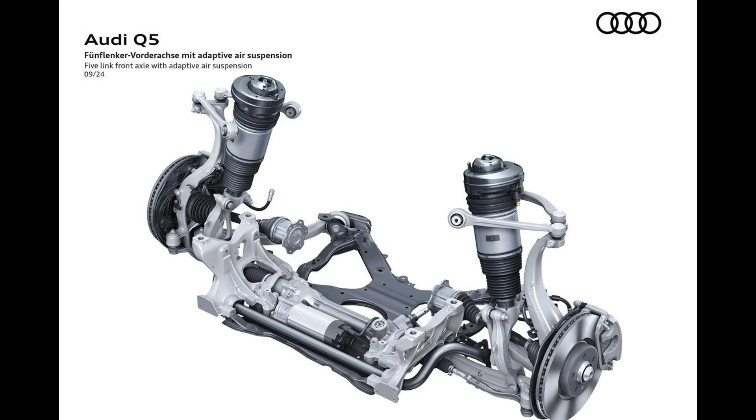Talk Shop: How Air Suspension Transforms Your Driving Experience.

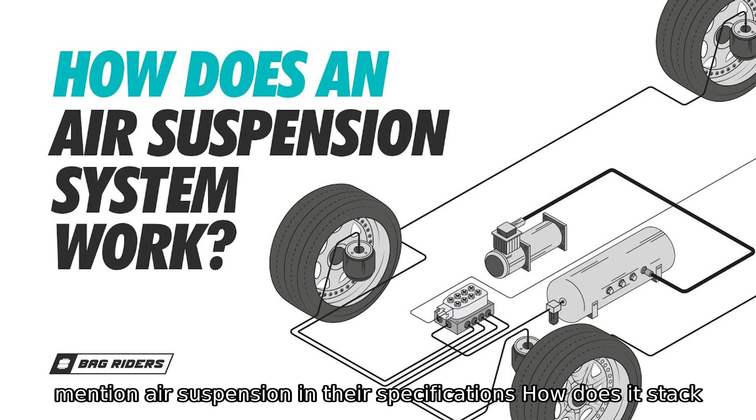Have you ever wondered what it really means when car manufacturers mention air suspension in their specifications? How does it stack up against traditional systems like double-wishbone, multi-link, or MacPherson strut setups? Let's dive into the fascinating world of air suspension and uncover its secrets.

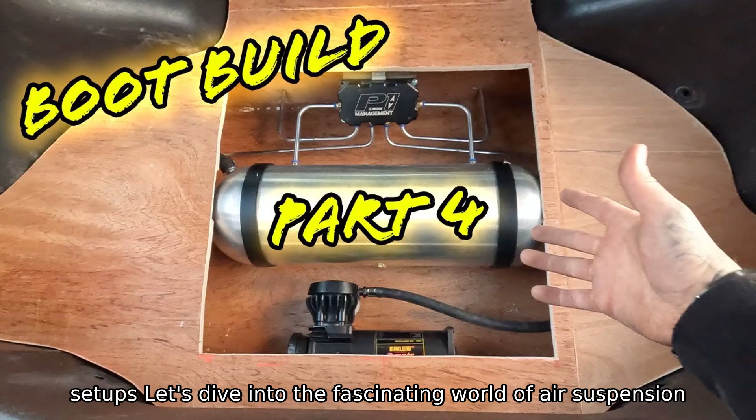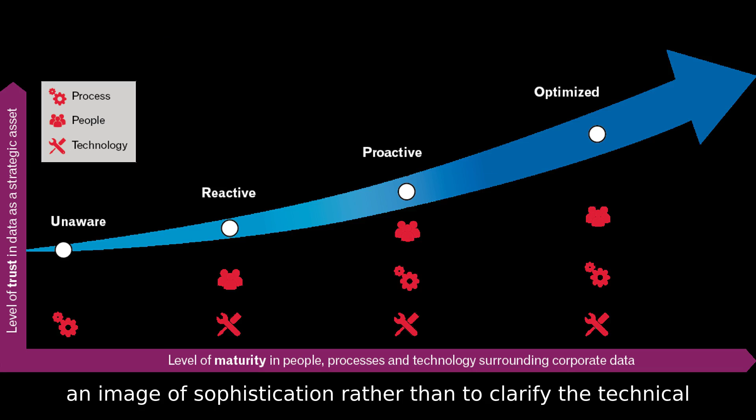Often, when you see the term air suspension on a spec sheet, there's little explanation provided. This is likely a deliberate choice by manufacturers to project an image of sophistication rather than to clarify the technical details of their suspension systems.

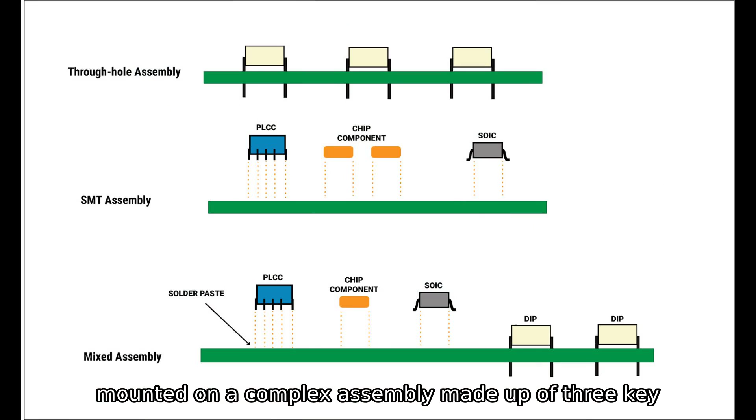To understand air suspension, it's essential to know that each wheel of a car is mounted on a complex assembly made up of three key components: interconnecting levers or linkages, a spring, and a damper. Interestingly, the design of the front suspension usually differs from the rear. This is because the front wheels not only steer the vehicle but also bear 70 to 80% of the braking force.

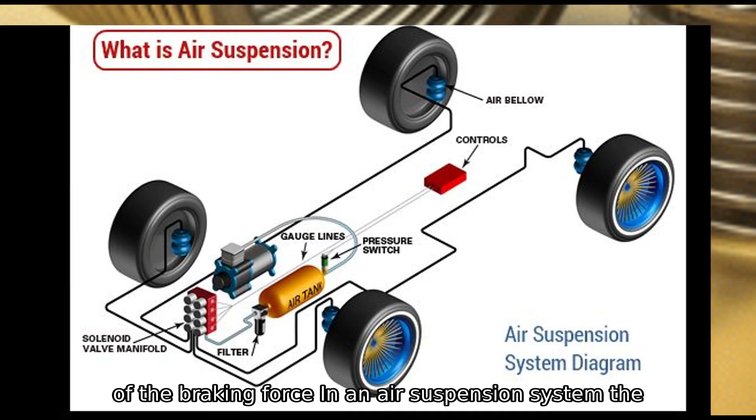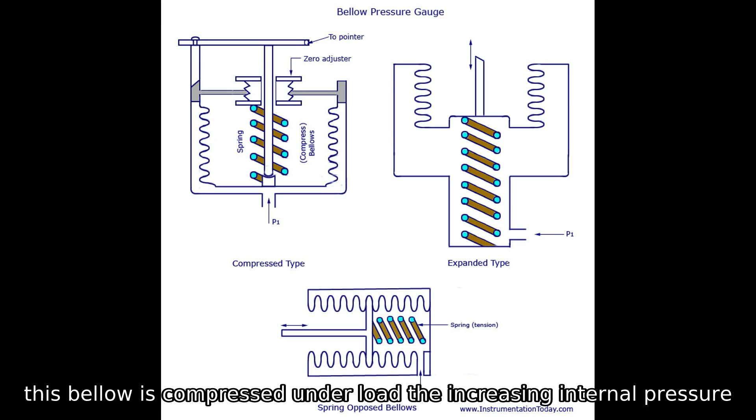In an air suspension system, the traditional steel spring is replaced with a rubber bellow filled with pressurized air, courtesy of an onboard air compressor. When this bellow is compressed under load, the increasing internal pressure compensates for the reduced volume, effectively acting as a spring. This innovative design absorbs road shocks and keeps the vehicle body level.

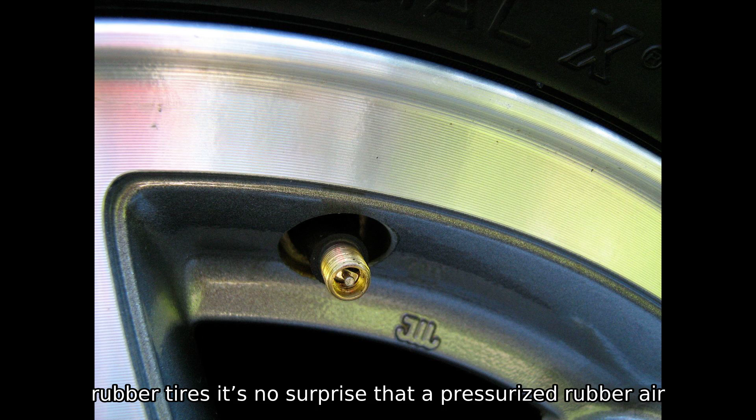Just like how your car rests on air-filled rubber tires, it's no surprise that a pressurized rubber air plenum can handle various road impacts with ease.

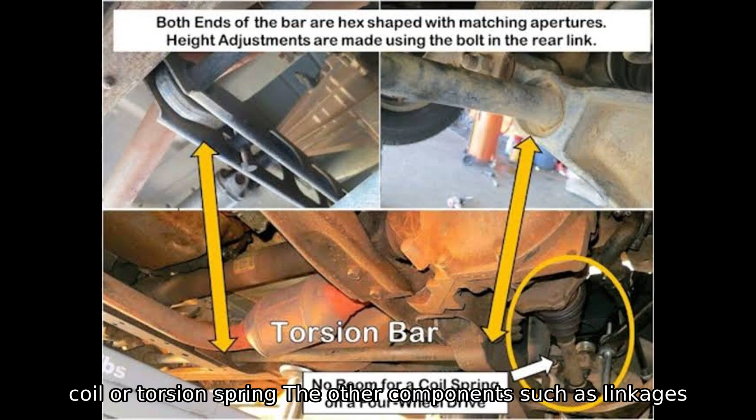What's more, any double wishbone, MacPherson strut, or multi-link system can be fitted with an air or pneumatic spring instead of a steel coil or torsion spring. The other components, such as linkages and hydraulic shock absorbers, remain unchanged from a conventional setup. This flexibility allows air suspension to be utilized on all four wheels or, in many cases, just the rear.

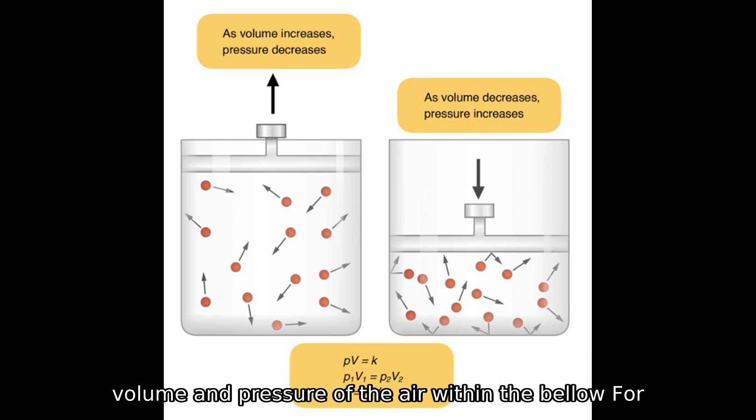One of the standout features of air suspension is its ability to adjust spring rate and ride height by varying the volume and pressure of the air within the bellow. For instance, if your trunk is packed with luggage, the vehicle's suspension control unit kicks in, activating the compressor to boost air pressure in the bellows. This adjustment restores the original ride height and increases spring stiffness to support the added weight. This adaptability is the hallmark of air suspension, making it a game-changer in automotive design.

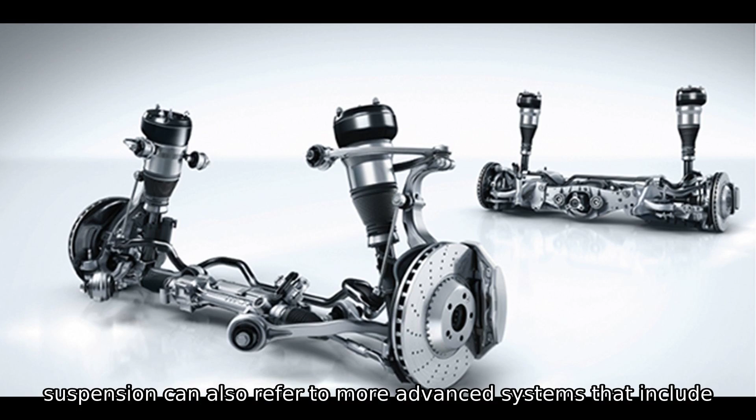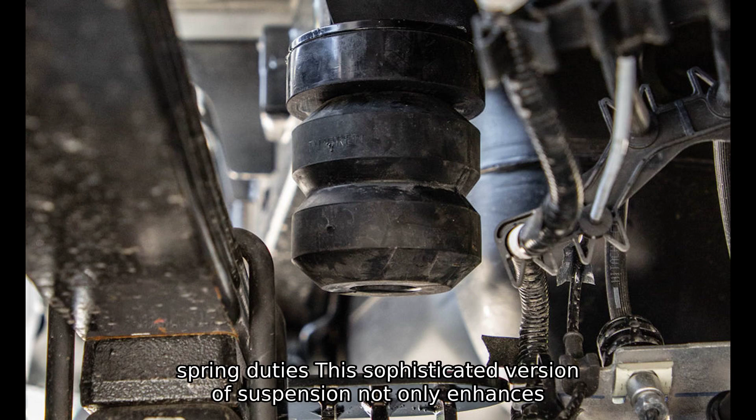Additionally, the term air suspension can also refer to more advanced systems that include variable rate dampers. Similar to the original Citroën hydro-pneumatic system, these setups utilize pressurized hydraulic fluid, aided by high-pressure nitrogen, to manage damping functions while the pneumatic bellows handle the spring duties. This sophisticated version of suspension not only enhances handling but also elevates ride comfort to new heights. However, this luxury comes at a price, making it a feature typically found in high-end vehicles.